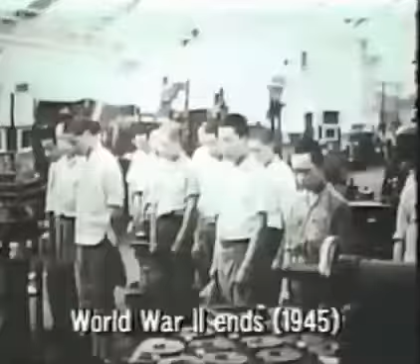After the war, Kiichiro passed on his dream to his cousin Eiji. He instructed Eiji to bring the company up to U.S. standards of technology within 3 years.

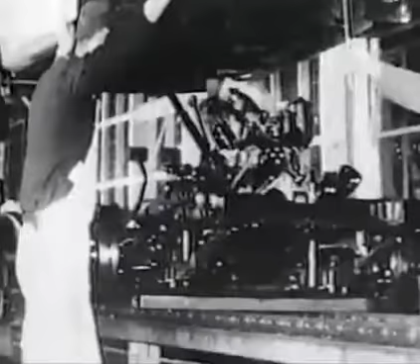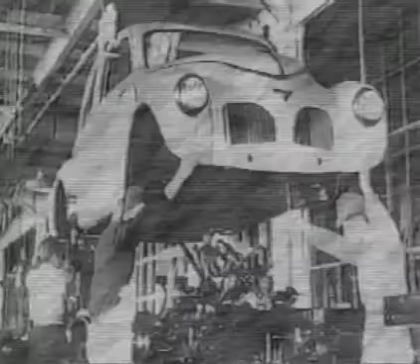That was a daunting task. U.S. productivity in automobile manufacturing was 8 times higher than Japan's, and Toyota was short of equipment and capital. So raising productivity was a pressing issue. Eiji assigned a machine shop manager by the name of Taiichi Ohno to develop a more efficient production system.

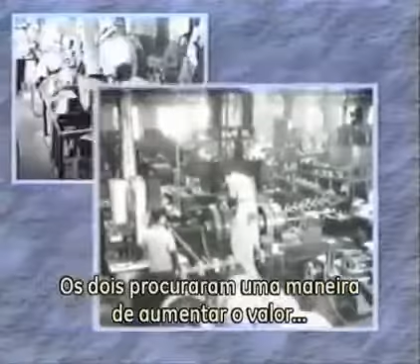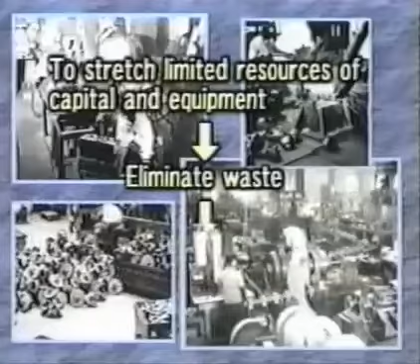The two men looked for ways to raise the value-added productivity of every worker. They did that by putting Sakichi's Jidoka concept to work throughout their operations. They also looked for other ways to stretch their limited resources of equipment and capital. They did that by putting Kiichiro's just-in-time concept to work systematically.

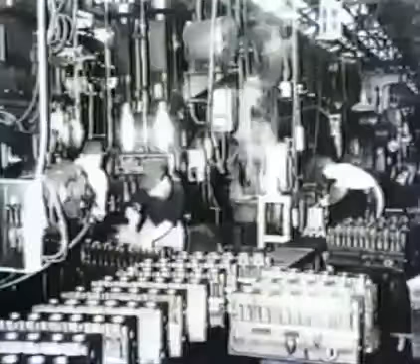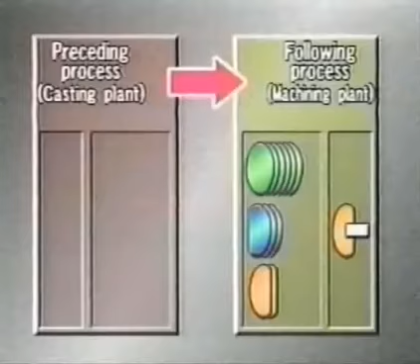Ohno took a cue from the U.S. supermarket. He made each process the customer for the preceding process. In traditional manufacturing, processes delivered parts to the following processes regardless of what was actually needed.

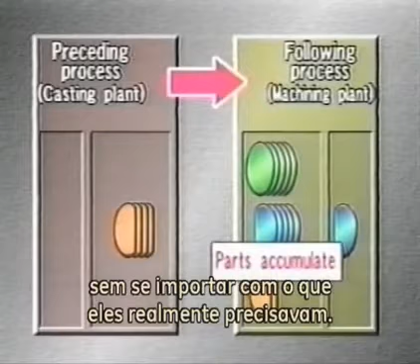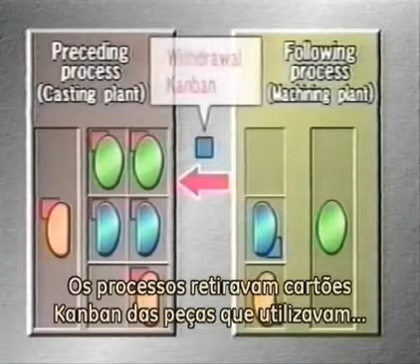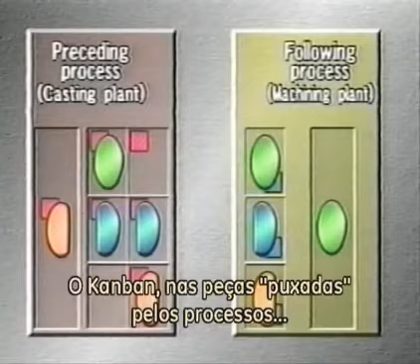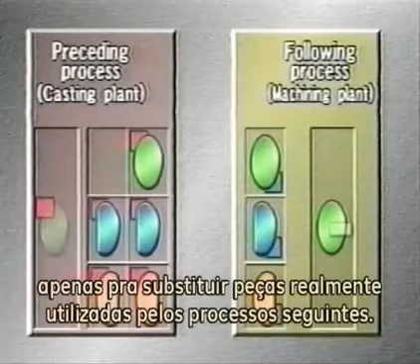Ono devised a completely new kind of system. Processes used Kanban cards removed from parts they had consumed to withdraw parts from the preceding processes. Kanban on the parts arrayed by processes came off when the following processes withdrew the parts. They became instructions to make additional parts. The Kanban flow ensured that processes made parts only to replace parts actually consumed by the following processes.

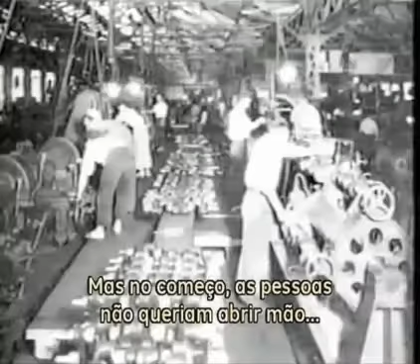Active cooperation by the people in the workplace would be essential to Ono's system. But at first, people were reluctant to give up their old ways of doing things. Ono took the initiative. He went into the workplace and taught people how to use his system. Eiji Toyota supported Ono enthusiastically in putting the new production system in place.

A new production system gradually took shape on the foundation of just-in-time manufacturing and Jidoka intelligent automation. As the Toyota production system, it became a standard for manufacturing industries. The Toyota production system gained global attention after the oil crisis of 1973. Toyota recovered more quickly than other automakers from the crisis, and its production system received much of the credit for that resilience.

General Motors Corporation approached Toyota about setting up a joint venture to make small cars in the United States. The two companies set up New United Motor Manufacturing Incorporated in California in 1984. Differences in language and culture presented big challenges, but the spirit of making things well knows no borders.

People accepted the Toyota production system, and the Toyota-GM joint venture became the highest-ranked automobile plant in the United States for quality. It became a symbol of successful industrial cooperation between Japan and the United States. A book published by the Massachusetts Institute of Technology hailed the Toyota production system as the machine that changed the world.

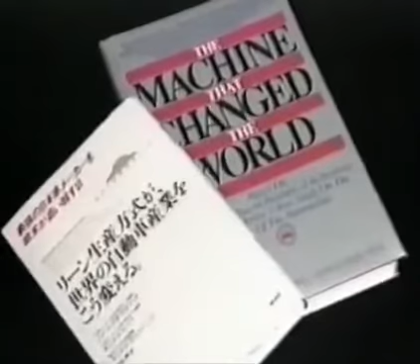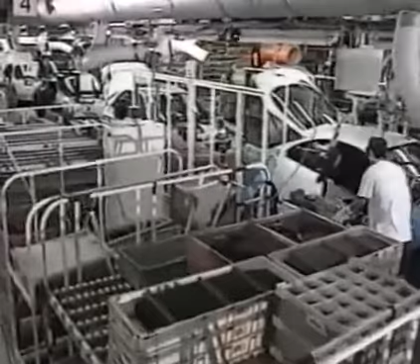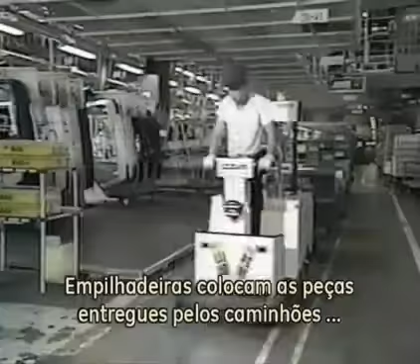Today, the Toyota production system has gained a worldwide following. Let's see how the system now operates in the world's most modern automobile plants. The trucks that deliver parts to the plants carry a variety of items in each load. That allows each truck to travel fully loaded, which minimizes trips and thus reduces traffic congestion. Forklifts carry the parts unloaded from the delivery trucks to racks alongside the assembly lines.

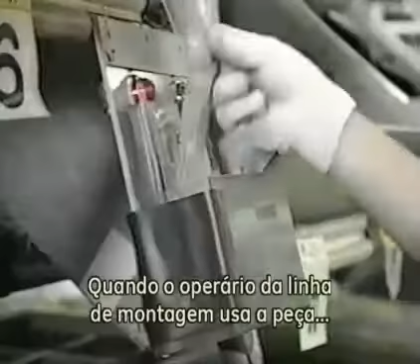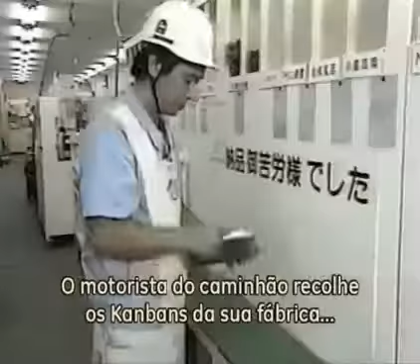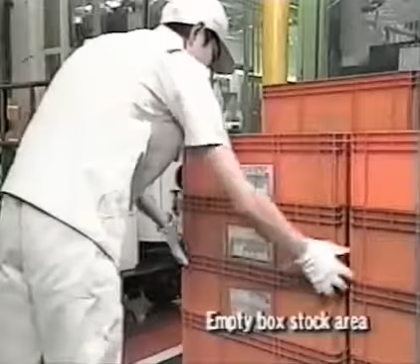When people on the assembly line use the parts, they remove the attached Kanban cards. The Kanban get picked up regularly and sorted. The delivery truck drivers pick up the Kanban for their company or companies before leaving. Back at the supplier's plants, the Kanban become orders for withdrawing additional parts. Sorting arranges the Kanban according to area in the plant. Shipping personnel exchange the Kanban and empty boxes for full boxes.

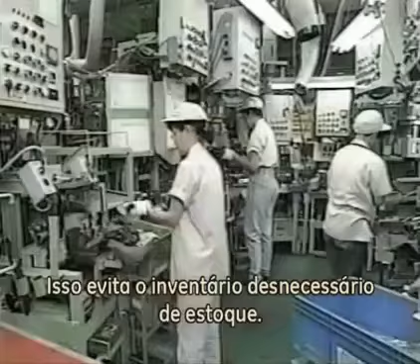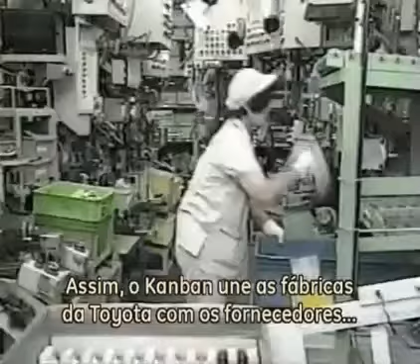The production processes in the plant make additional parts only to replace parts that have been withdrawn. That prevents the wasteful buildup of inventories. When the shipping personnel have gathered a full truckload of parts, a truck carries the parts to the vehicle plant. Kanban thus link Toyota plants with suppliers' plants, as well as linking the processes inside the Toyota plants. Just-in-time manufacturing minimizes inventories, eliminates waste, and maximizes productivity at all the plants that participate in the Toyota production system.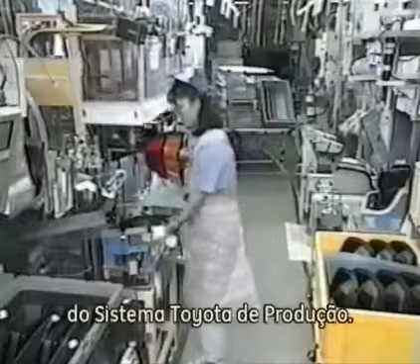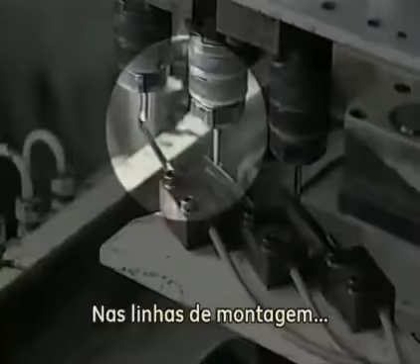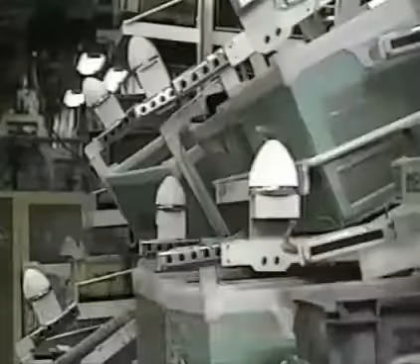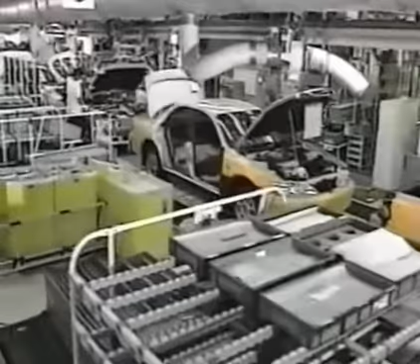Jidoka intelligent automation also continues to play a big role in the system. On automated machining lines, andon lamps light up to call attention immediately to any problems detected by sensors. On assembly lines, the employees themselves have devised countless Jidoka measures to prevent defective work. So Sakichi's concept continues to prevent waste. The idea is to build quality assurance into every process, and it works.

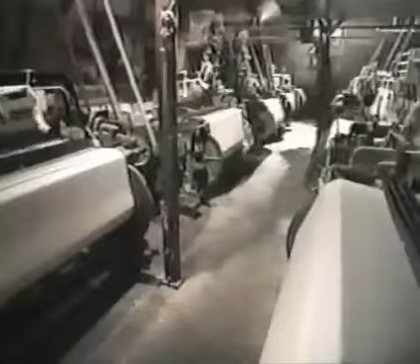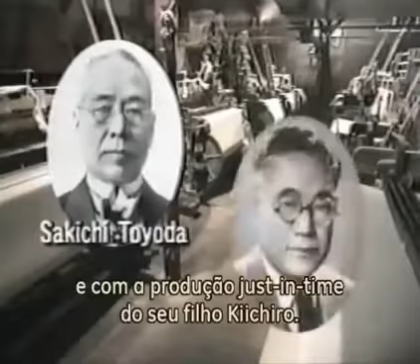The foundation for the Toyota production system has been established by Sakichi's Jidoka intelligent automation and his son Kiichiro's just-in-time manufacturing. Taiichi Ohno and others put those concepts to work systematically with the strong support of Eiji Toyoda and his passion for manufacturing.

The Toyota production system continues to evolve in response to changing needs and circumstances, but the fundamental concepts are eternal, including Toyota's commitment to continuing improvement in every phase of products and operations. Those concepts underlie a lasting contribution to enhancing the quality of life for people everywhere.